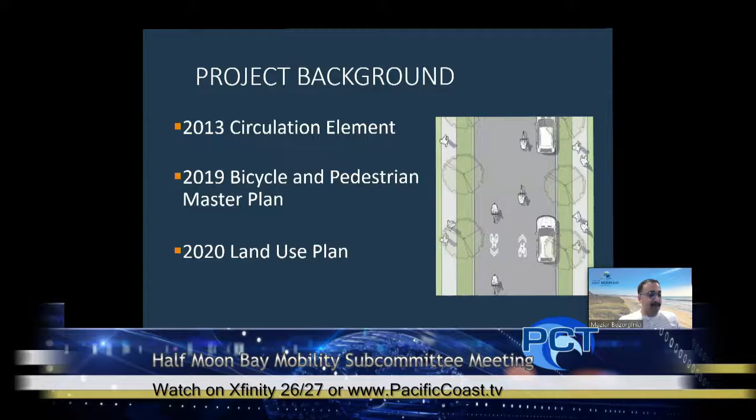This project has been anticipated in multiple city adopted plans and capital improvement programs over the last few years. It's identified as an implementing action from the 2013 Circulation Element for supporting bicycle and pedestrian travel along routes that connect the Coastal Trail with the Naomi Patridge Trail and Main Street. The 2019 Bicycle and Pedestrian Master Plan identifies Poplar Street as a major connector street with significant sidewalk gaps, making recommendations for Class 3 bicycle improvements, high visibility crosswalks, and pedestrian pathway connectivity. The recently updated Land Use Plan further recognizes the need for this project to improve coastal access while being context sensitive to the neighborhood character.

Some project background: as John mentioned, there was a resolution of support from the City Council back in 2017 for the grant application submitted for the OBAG 2 grant, the One Bay Area 2 grant. There are some concerns with the timing of that — obviously 2017, it's been a while since those funds came through. They're actually in the process of distributing OBAG 3 grant funding now, so we're at the tail end of the grant program for OBAG 2.

Going back a bit, we've been doing quite a bit of community outreach since that time. We had our first major community workshop in September of 2018, followed up with BPAC meetings and updates in November of that year. I want to highlight that we attended the Senior Transportation Fair back in January 2019. It was a wonderful event, and we were able to highlight and showcase our thoughts and project schedule at that time with the seniors, and we received quite a bit of positive feedback from those in attendance.

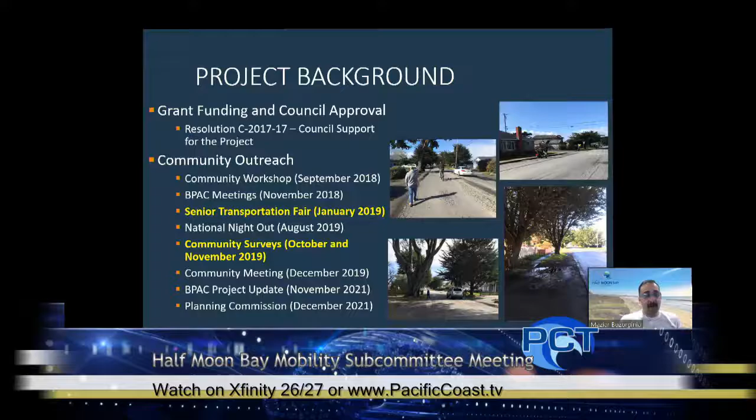After those surveys, we had a community meeting that December, and the next meeting after that was the Bicycle and Pedestrian Advisory Committee project update in November of this year. I don't want to belabor the point, but I wanted to mention the delay caused originally by the beginning of the COVID-19 pandemic and some of our budgetary issues and concerns — this was one of the projects that were unfortunately shelved at that time, so there wasn't a lot of work done.

In 2021, we were able to restart the project. I wanted to highlight that because we do feel that lack of continuity from that December meeting to the BPAC project update in November of '21 had an adverse impact on our momentum on this project. Two years is a long time, especially these specific two years, during which a lot of folks went through quite a bit of hardship on many fronts. Most recently, we had a Planning Commission meeting this past Tuesday, which we'll talk a little more about, including some of the comments that came from there.

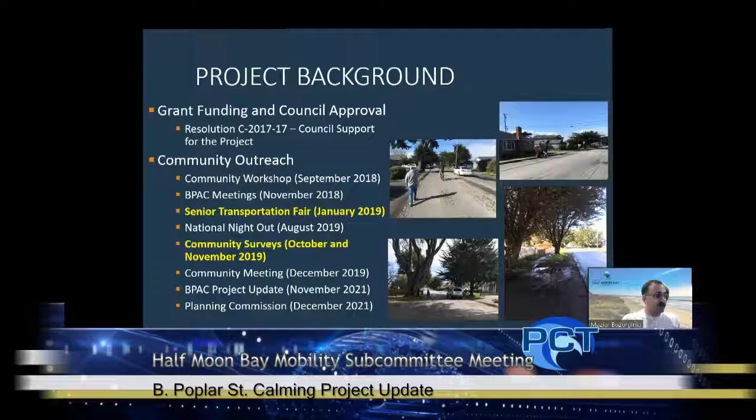A little bit more project overview. The Poplar Street traffic calming and safety project includes traffic calming measures. We're looking at traffic circles as well as utilizing existing parking spaces and other methods, which we'll get into in a little bit more detail. We're also looking at bike ped connectivity improvements as well as safety improvements, street repairs, maintaining our existing pavement section, as well as drainage improvements along Poplar Street to capture some of the stormwater currently surface flowing through Poplar, as well as implementing our green infrastructure program.

We do require some permits. There is a CDP, a coastal development permit required for this project, given it's a public works project in the coastal zone, as well as a tree removal permit for a few trees on the downtown side of the project near Main Street. There are 6 trees required for removal, given the line of sight and their location being right underneath some utility lines. Unfortunately those are the ones that will be removed, and we have replacements as part of those, which I'll talk to in a little bit more detail.

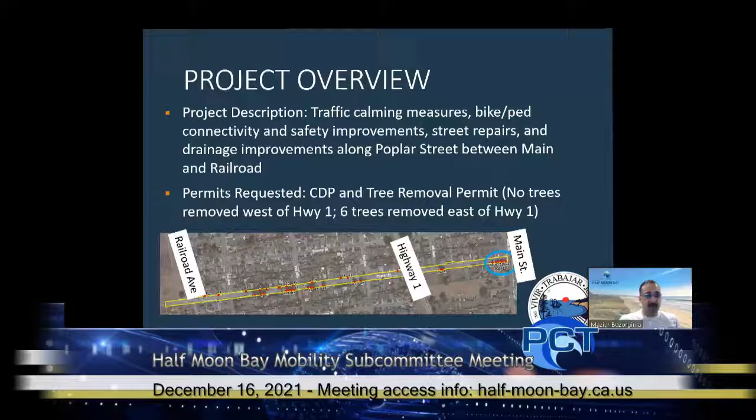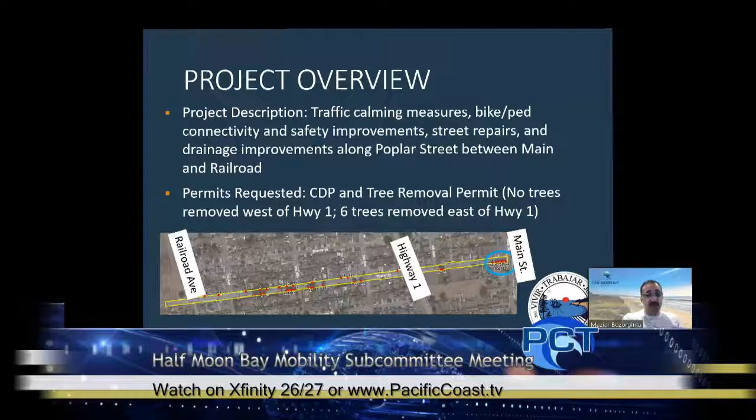None of the cypress trees on the west side that are really iconic to the character of the street are being recommended for removal. Some minor pruning may be done as part of the project, but nothing major and no removals on the west side.

I talked a little bit about that. These are the 6 London trees that we were talking about. This would be to accommodate the sidewalk improvements and to ensure line of sight for folks at the intersections. And with the removal of those, we're looking at implementing approximately 30 new street trees along this corridor.

This is the one segment, I would say, where we do have a kind of open view of the cross section as you're coming through. And lining the street up with trees also provides that traffic calming benefit that narrows the visibility of the view corridor for a driver. So that'll be the trade-off there, is that we would be able to construct and plant 30 new ones. And again, no trees are being proposed to be removed on the west side of Highway 1.

Here I just want to talk a little bit about our project goals and benefits. This of course ties a lot to the funding and our grant application and program that we've been awarded.

So why are we here? As the city's bicycle and pedestrian master plan was commencing, many community members requested improvements in access for safety, especially along Poplar. The senior center was a big proponent for this project, as well as a lot of parents with school-age kids. The Seacrest School comes to mind, but others as well that walk through this corridor.

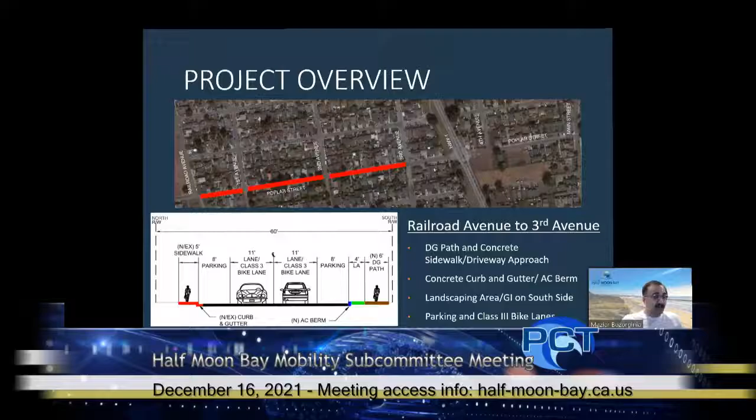John, that's correct. And I also wanted to highlight that for this project, we were proposing to pave the parking areas as is typical for existing parking along improved streets in Half Moon Bay. Although that was one of the feedback items we received from the Planning Commission, that they did not like that portion of the pavement.

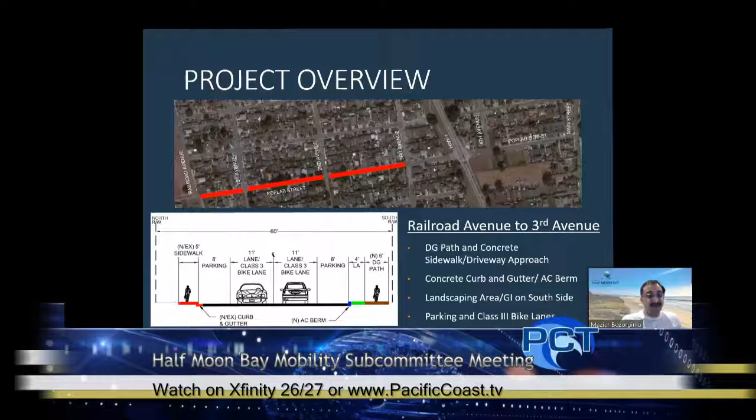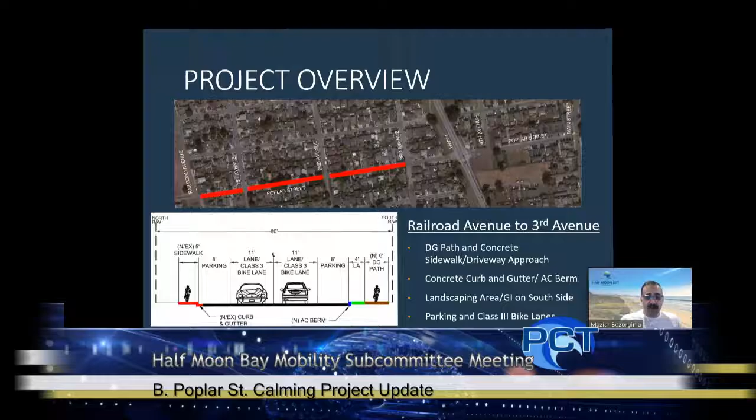And I just wanted to emphasize that this is not a street widening project. That was a comment that was received by staff, and I just wanted to reiterate that we are not widening the travel lanes in any particular location. The only areas where we were looking at additional asphalt were for the parking areas, and that was for longevity and long-term maintenance of the area. So just wanted to reiterate that.

There is a very unique segment within this section of the project, and I wanted to highlight that. It's between First and Second Avenue, where we have those two very large cypress trees that are slightly offset. It's a very iconic cross section as you drive through Poplar Street, and I wanted to make very clear that these are two of the most mature and beautiful trees out there, and our intention is not to remove them. In these locations we would actually look at doing a decomposed granite pathway on the south side, for the purpose of protecting the root system of these cypress trees to ensure their health is maintained, and keeping the area around the trees as part of the landscaping and green infrastructure.

As we get closer to Highway 1, the characteristic of the street changes a little bit. There aren't any existing trees. Hey Moz, can you go backwards? Go back one slide.

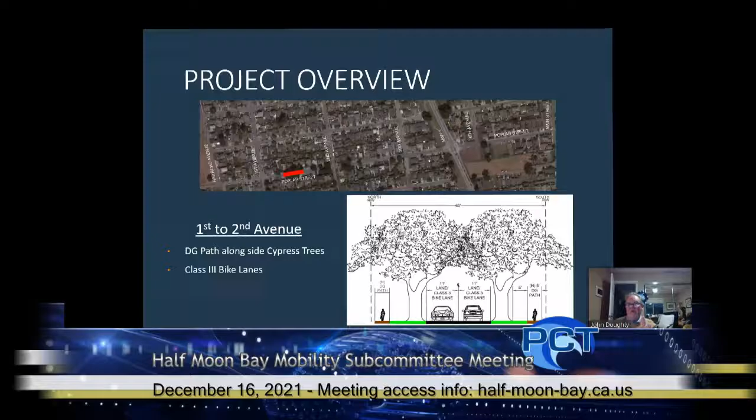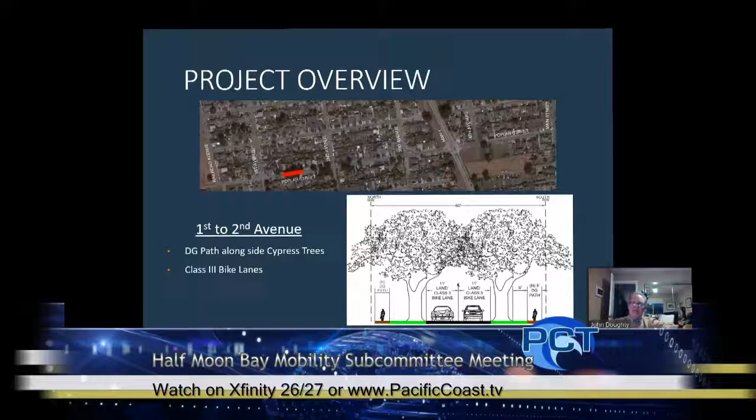What I will say, if you look at those trees, part of our designs are driven by trying to maintain relative continuity in the pedestrian access and path of travel. And these trees certainly, and retention of these trees, make that difficult. It's very difficult to say—instead of having the parking, in part that would be a problem because of the Coastal Act. But beyond that point, you also have the issue of these trees being right in the way of having bike lanes off to the side of the 11-foot travel lanes. So you would have this point where you would break up these lanes and deal with that. So these are iconic, we want to preserve them and deal with it, but they have created a challenge in design.

I think it's an important piece to understand why we've had to balance all of these desires and community wants and needs out of this deal. That's all, I just wanted to point that out while you had it up. Thank you, John, appreciate that.

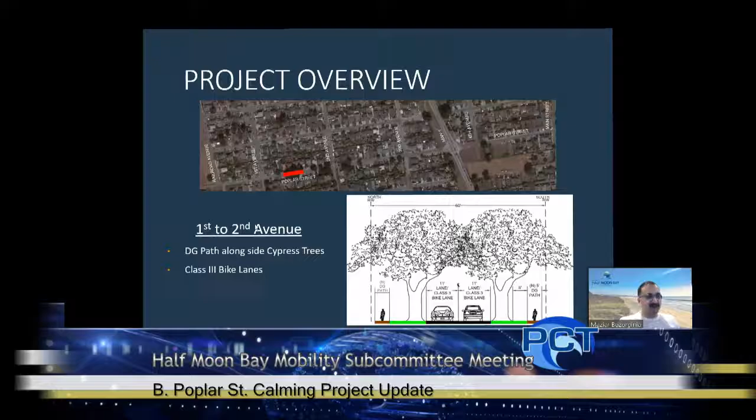And in a unique way, we're using it as traffic calming. Essentially they're bulb outs, so in that regard we shifted to using this with that intended benefit. All right, so now with this segment, the small segment from 3rd Avenue to Highway 1...

This particular area is a little bit different in that we have existing concrete sidewalk on the south side. There aren't really any trees - I think there are some bushes, shrubs, and landscaping, but no major trees in this particular location. And on the north side, we actually have a lot of the shoulders already paved with asphalt.

So in this segment we're looking at installing concrete sidewalks and driveway approaches. And then, as we are with the remaining portions, we're looking at Class 3 bike lanes - sharrows with the vehicular traffic through this area.

All right, the third segment we'll talk about is the intersection with Highway 1. It obviously has its own unique characteristics and scope of improvements. We originally were looking at how we could best work this intersection and modify it to improve connectivity for our project.

However, during our design process there were some conversations with Caltrans, and it came out that they're actually working on a major project for pedestrian and bicycle access and safety. The project itself is actually very large scale - they're looking at improvements from Wavecrest to Moss Beach.

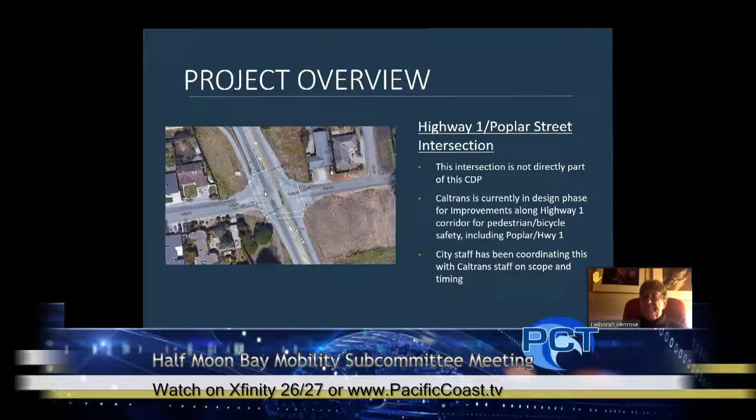It's along the entire corridor, east and west side. So east and west? Yeah, they're not - it's not going to be a continuous... I doubt that we're going to have a continuous one. I haven't seen the scope right now. They've been taking a lot of feedback from the community.

So we've mentioned the need for connectivity for east and west side for Class 1s, but they're going to be looking - I think more specifically at the crossings of the intersection and improving the intersection equipment itself. So I'm thinking more like bulb outs and ADA ramps at the corners, the refuge islands in the medians where folks who may be walking slower can have a safer place to pause and push another button. But we will also continue to push them for the overall connectivity along the corridor, both on the east and west side as well.

Thank you. Absolutely, and again that's in the very early stages of the project, but based on the schedule they've been doing, they've completed their survey work throughout the corridor. They were actually out here a few months ago, and we will be getting an environmental document for review in the coming months. So this is going to be coming up pretty quickly here, and it's a really great opportunity for the overall community. I will be doing an additional update to the council on this separately.

Because obviously this was one major intersection, but they're looking at all of them. So we're going to have a lot of great opportunity to really advocate for the improvements of safety that we're looking for through the Highway 1 corridor. So we're going to continue coordinating with them, and with that we can save the money and utilize those dollars on the local street section. We will be looking at some connectivity improvements in the interim.

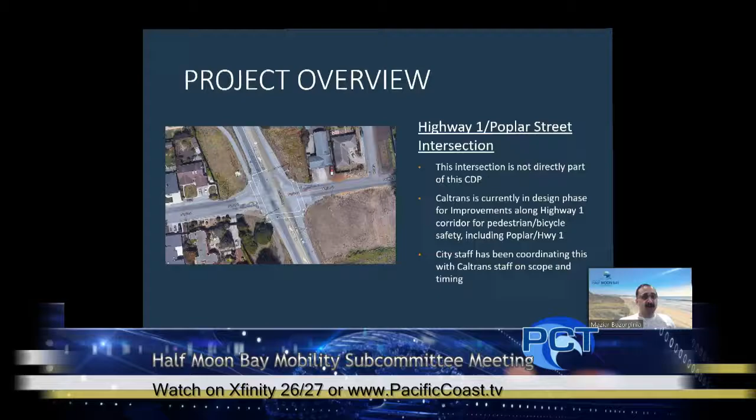Possibly tweaking the signal with Caltrans representatives to ensure that bikes will get detected as they approach the intersection. It'll be a share the road scenario for avid cyclists as well as novice or recreational riders, who would be able to dismount and use the crosswalk to get across Highway 1. That'll be the temporary improvement while we wait for Caltrans. Based on the schedule they shared and ours, we anticipate they would come on board right after we complete our project.

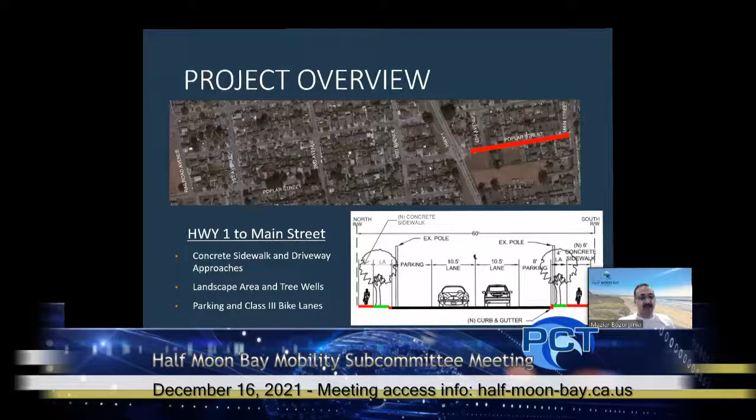Next we have the segment that's more of a commercial downtown feel, though there is residential as well. From the east side of Highway 1 to Main Street, we're looking at implementing concrete sidewalks on both sides, and establishing tree lines along the corridor, especially on the south side of this segment of Poplar, where there aren't a lot of existing trees. There are 6 grouped close to the Main Street intersection. Our hope is that this project would remove those and replant with over 30 spread throughout the corridor, giving it more of a calming feel and closing that tunnel vision frame a driver gets going through the corridor.

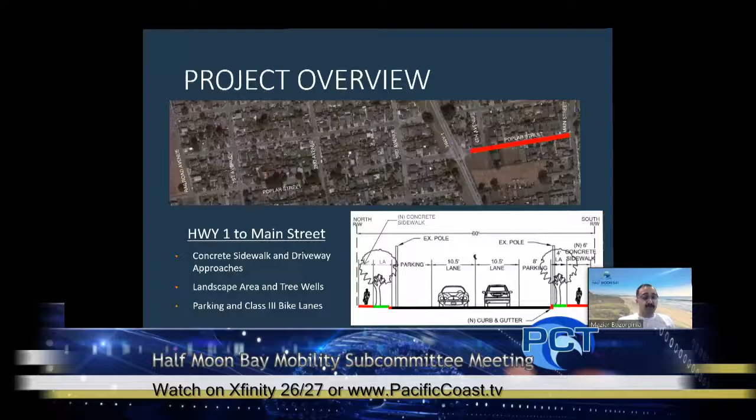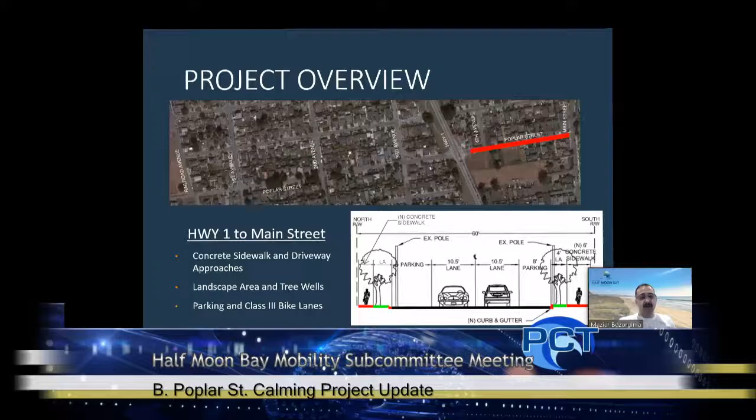One comment we received from Planning Commission and in writing was that community members would like to see more traffic calming elements here. We do have parking, which when filled provides a narrowing of the vision, and we'll have pavement markings that also narrow the lanes. But some comments wanted to see more than that, so we're looking at it. There's potential for a traffic circle at 4th Avenue or bulb outs in other areas. We've taken those comments and will look at what we can incorporate, and we'll have something more robust on the east side as well based on the comments received.

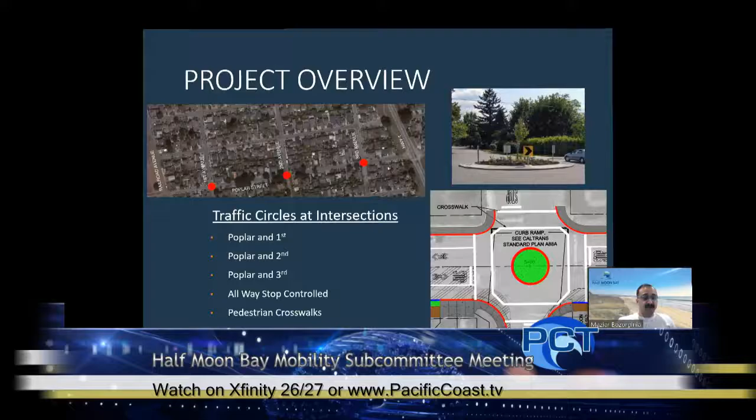We have pedestrian crosswalks proposed to delineate the areas and provide safe marked crossing points. Another benefit we're looking at is to utilize the center of these traffic circles for landscaping and beautification, as well as implementing additional green infrastructure to improve the quality and reduce the volume of runoff on the roadway, by removing some of the sediment and contaminants contained there.

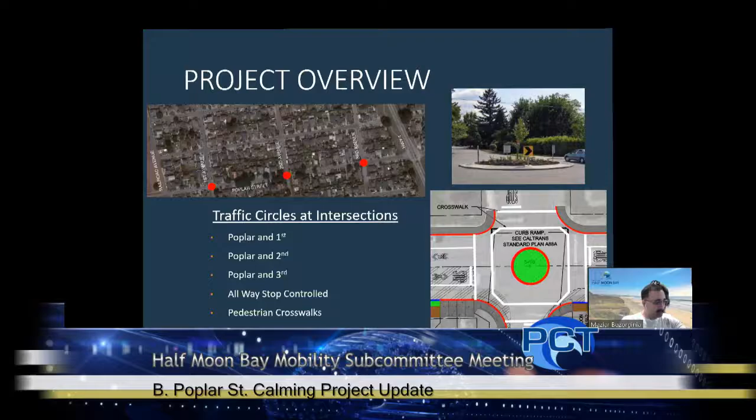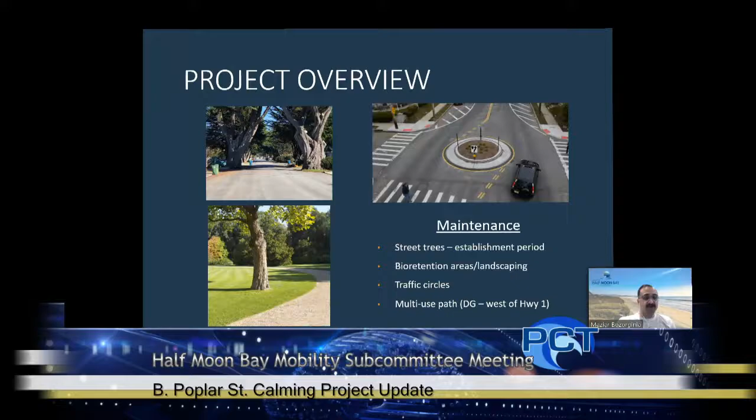A little bit on the maintenance side. As far as the establishment period, generally we look at 1 to 2 years for establishing street trees, which the city would oversee and maintain. Beyond the establishment period, we would partner with local residents and commercial business property owners to jointly maintain the street trees moving forward. The bioretention areas, traffic circles, and the decomposed granite pathway we're proposing will all be elements of maintenance required by city staff.

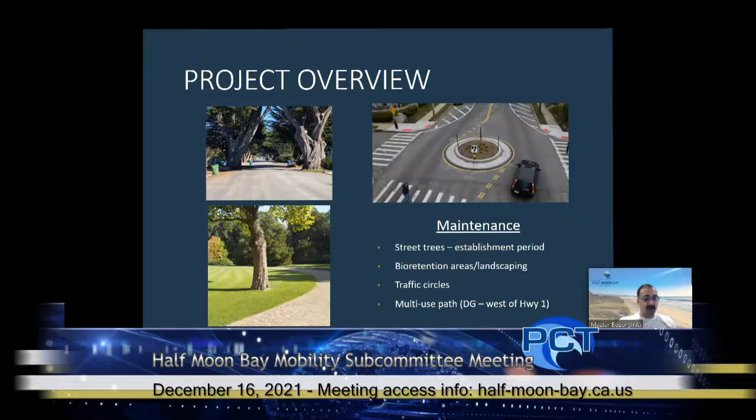Now I want to touch a little on the project funding. We talked about our overall grant proceeds - we have 1.2 million programmed for the time being. We are at the tail end of the cycle for this OBAG 2 grant, and therefore there is a potential for losing the funds, which is why we're looking to implement this project and move it forward as expeditiously as possible.

There's no exact deadline. The way these grant systems work, especially at the tail end, is that a lot of these programs are oversubscribed. As we get to the tail end, if other projects are looking to fill funding gaps and are shovel ready and farther along, there's a potential we could lose our place and get kicked down the line. If that happens, we could run out of OBAG 2 funding, and it doesn't roll over to OBAG 3. We'd have to resubmit an application and go through the process again.

Some other options we've been looking at are deferred street improvements. We have 21 deferred street improvement agreements along the corridor of the project, out of 90 total properties, of which I believe 10 are currently vacant. There's potential for some cost sharing as part of that, prorated per linear foot based on the improvements being proposed for the project. That would help some, but it's not going to cover the funding gap that we have.

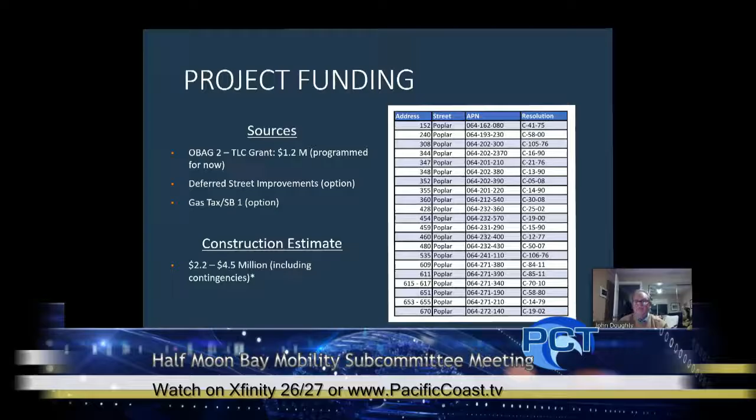The only thing I'll say, and I've said this before, is most of the people speeding are residents and neighbors, trying to beat that traffic light at the end during the morning commute.

The good news is if you do a pilot, it's easy to measure the efficacy because you put those little air hoses down, and it's pretty easy to gather the data - did it work or didn't it.

We did traffic counts, and Moz didn't mention it because we weren't trying to get into all the weeds, but those traffic counts, because of the tubes and all that, also pick up the idea of speed. Yeah, so we do have some of that data, and we did that in advance of doing the design on this project.

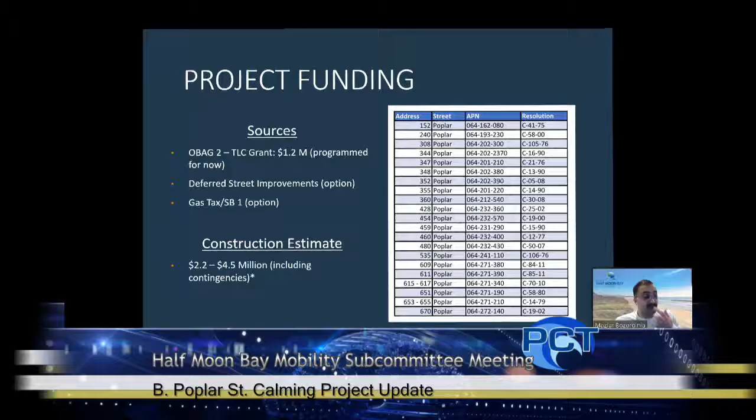That data is actually available on our website, and I'm happy to share it with you folks via PowerPoint if you'd like. That's great, and yeah, fantastic - thank you, very helpful, and I think this is useful for the community.

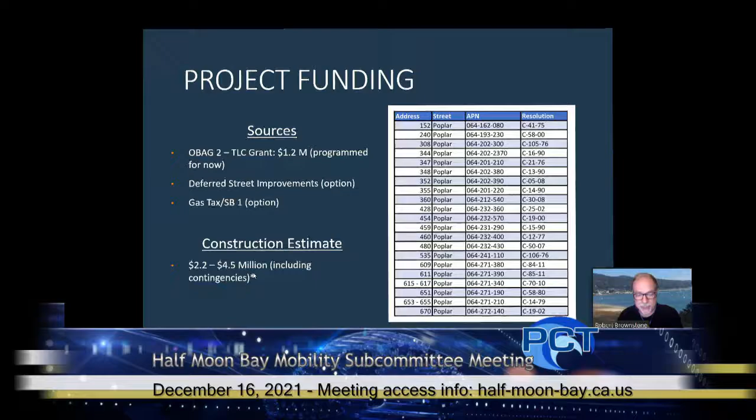I think you were back on mute, Deborah.

The first question I have has to do with the phasing of the project. I'm wondering if you've considered phasing it so that one side of the street is done at a time. I know it may be more expensive, but if we're talking about the safety of our children getting to school and our seniors getting to the beach, then having pavement on one side of the street going all the way from Main to the beach would be ideal as far as I'm concerned.

Councilmember, you are a genius. That's exactly how our phasing plan is being looked at - to basically do one side of the improvement and then come back and deal with the other side. It's exactly what we're looking at, for the reason that we get full disabled ADA access, and then we can come back and fix the other side when we have the money, if that's the way we have to go.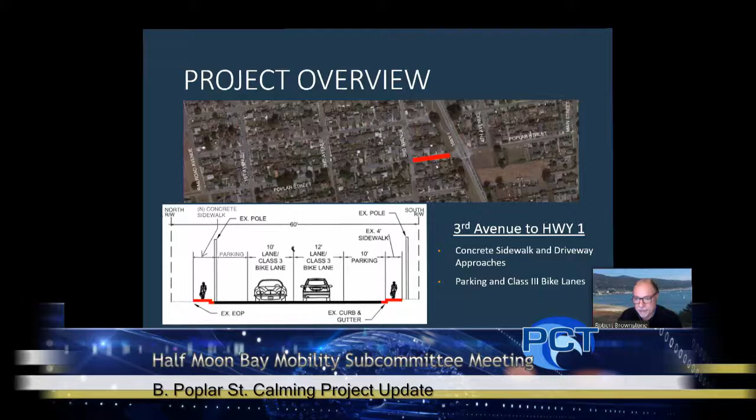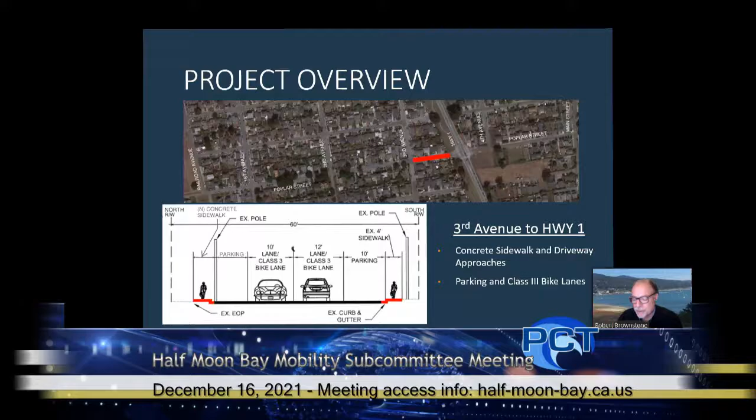Thank you, Councilmember Penrose, and I agree. Having the numbers, having the options sets us up for contingencies. If we get an extra grant, or if some other money comes from another project that a grant fulfills, it's nice to always know what each level of work will entail and cost.

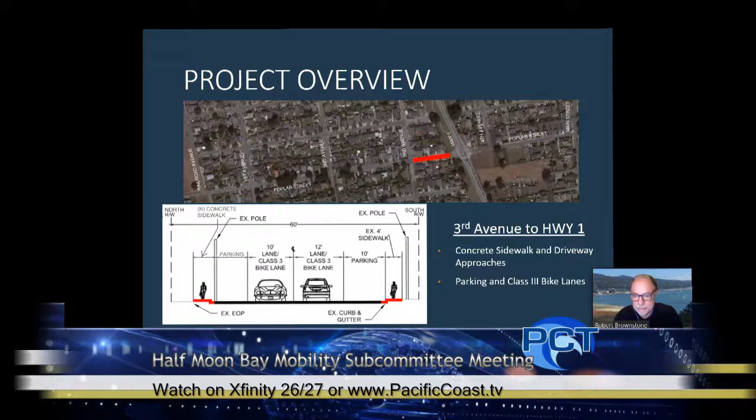Are we ready to move on to our second presentation on the Main Street Bridge update? Sound good? We are, let's do it.

I'll do a little introduction while Maz sets up. In November it was my 7-year anniversary with the city. I came on just after the election in November, when the initiative had gone through, and there was a lot of hand wringing in the community about the two initiatives and this bridge. I'm very sensitive to it, and my staff, I've tried to bring them up on the history, and I think they're very sensitive to the issues. We've really been trying over the last years to bring this forward and bring the community around, and not have this be a divisive issue at all.

This is a challenging issue, made more challenging by Caltrans and their construction requirements and new changes they made to safety requirements. It's just been, frankly, an uphill run to this point. We're obviously trying to maintain the integrity of the historic aesthetic of this bridge, and its functionality, while also trying to bring this around to something that will last for at least 75 more years, from a seismic standpoint and from scouring and the issues on that creek.

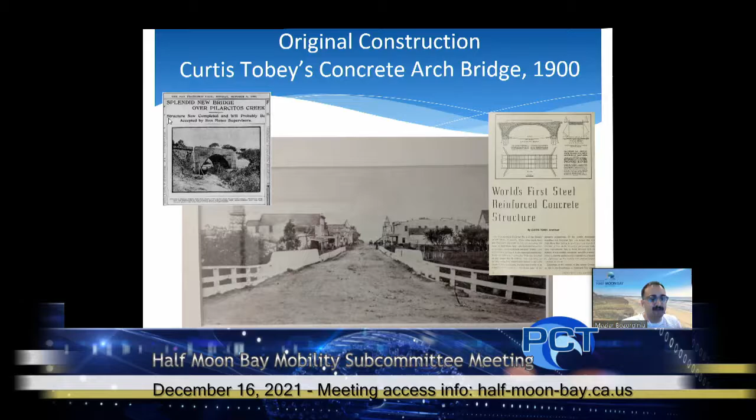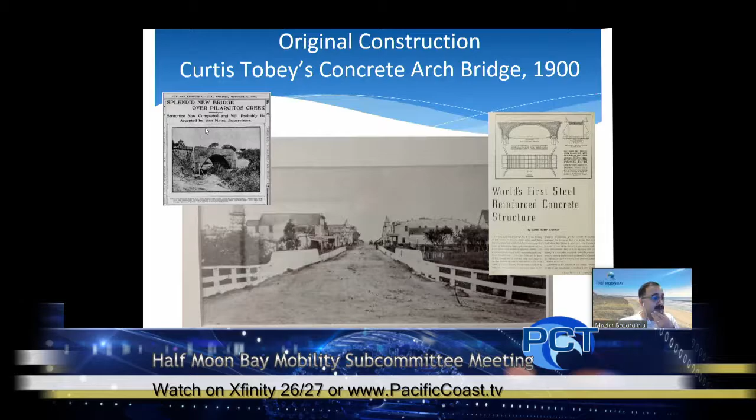Our original construction of this bridge was back in the 1900s. I have to point out, I love this news clipping, in that the way project delivery has changed over the years is notable. In this case, the bridge was built, and then they were hoping that the San Mateo County supervisors would accept it—a very different process back then. I had to point that out because the wording is also splendid, something you don't see in newspapers anymore. So this is what the original structure looked like early in its life.

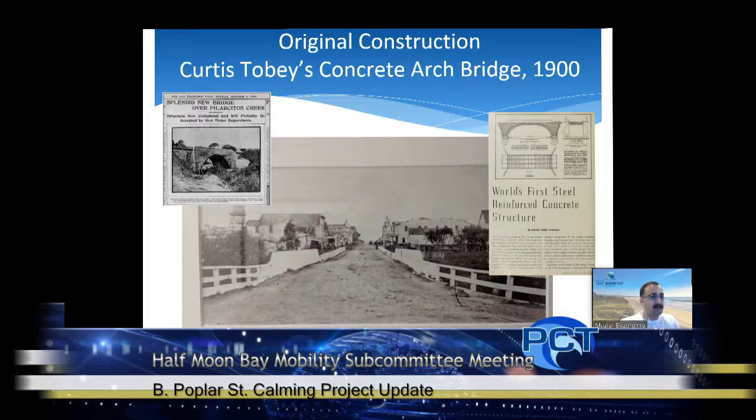Then, between the 1920s and 1940s, we got the addition of these walls and columns. That was something added on after the fact. We also added the sidewalk on the west side in that same time frame.

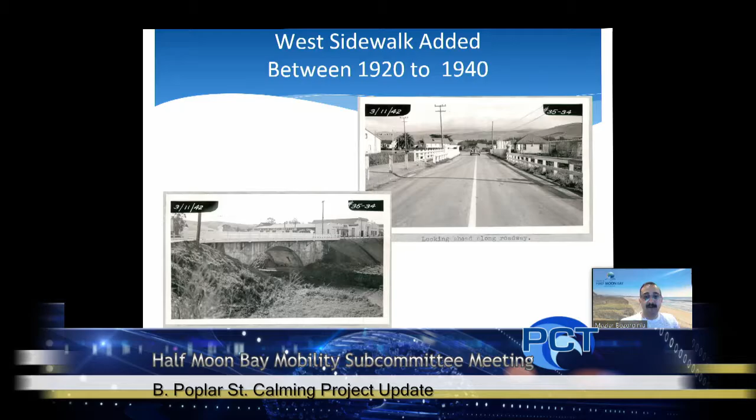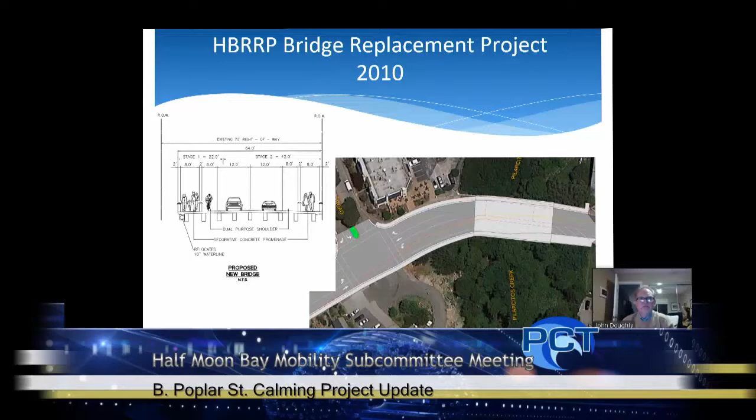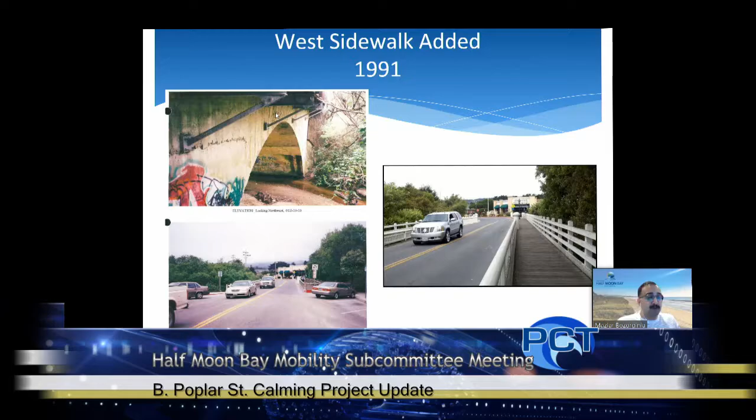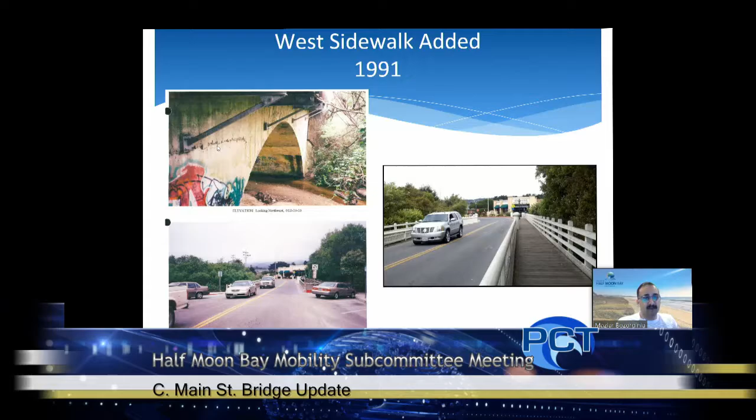Sure, just want to point out how these walkways are attached, since you have that picture up. Oh yes, another good picture. These walkways were added after the fact, and they're essentially supported by rods connected to the bridge structure itself. They're cantilevered out with extra support, which adds a little more weight and pressure to the sides of these wing walls and the arch structure itself. Thank you—that goes on both sides.

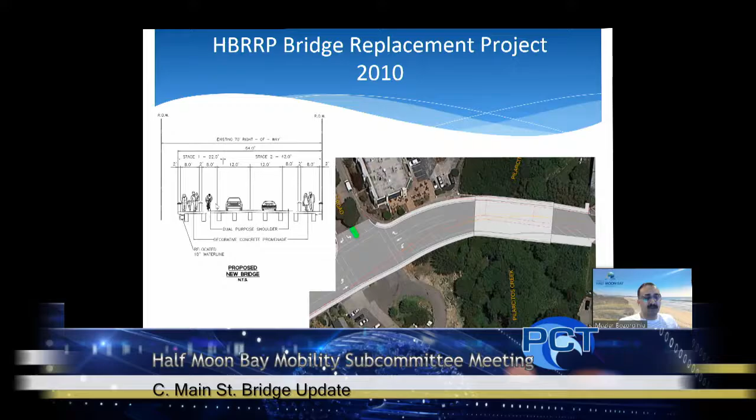Thanks, John. Back in 2010, this was when a lot of the funds started for some folks. The original proposal was to do a pretty significant widening in relation to what existed. There was some purpose for that—there could be the addition of bike lanes, although no additional vehicular lanes were proposed at that time. But there was a lot of conversation about that, which brings us to 2014 and Measure F, and the registration of this on the National Register of Historic Structures.

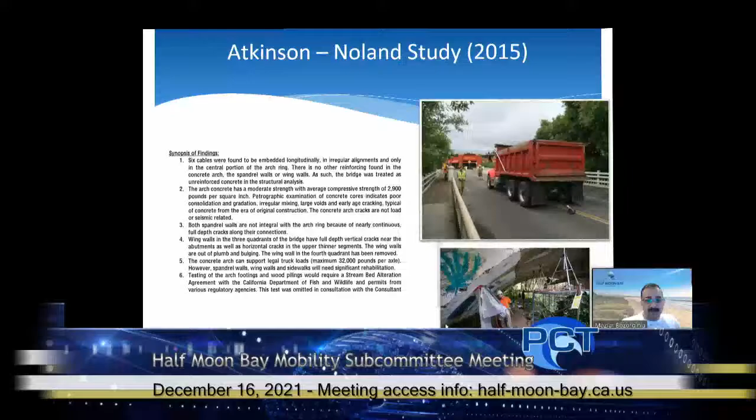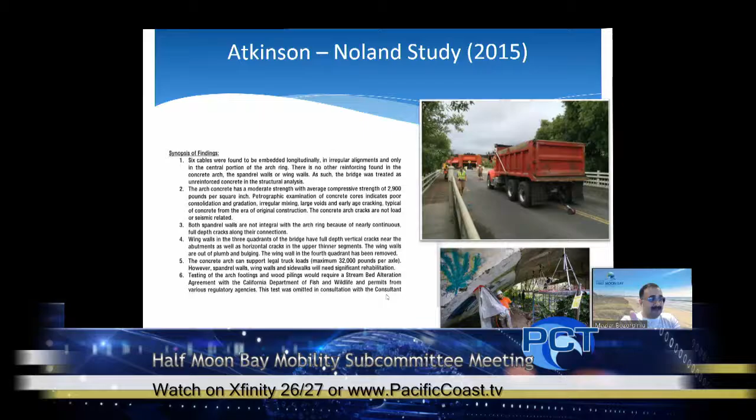I think I do. So you have the spandrel arch here, and beyond that you have what kind of looks like a wing coming off of the bridge — the area that goes back into the embankments to hold the abutment back. It's where it flares out and goes up against the sides. A lot of it's actually hidden; you see them as concrete against the stream bank that the bridge is basically locked into. It's the foundation system for the tie-in.

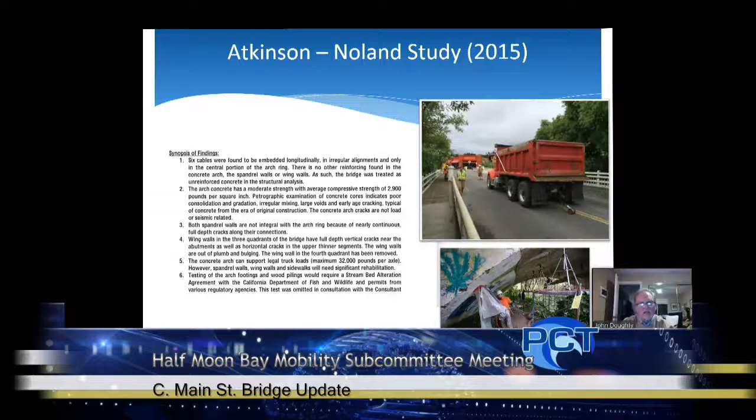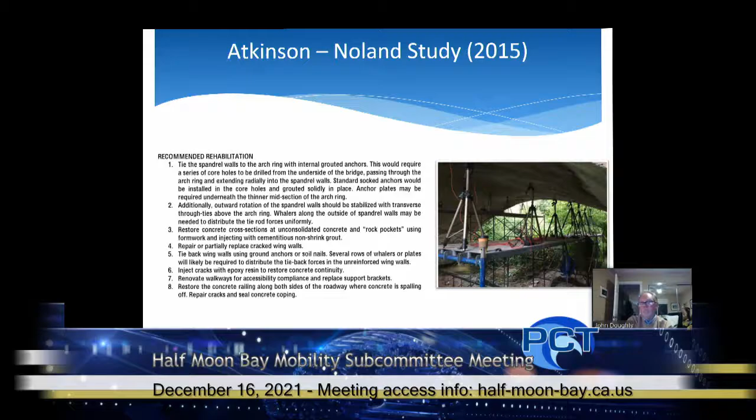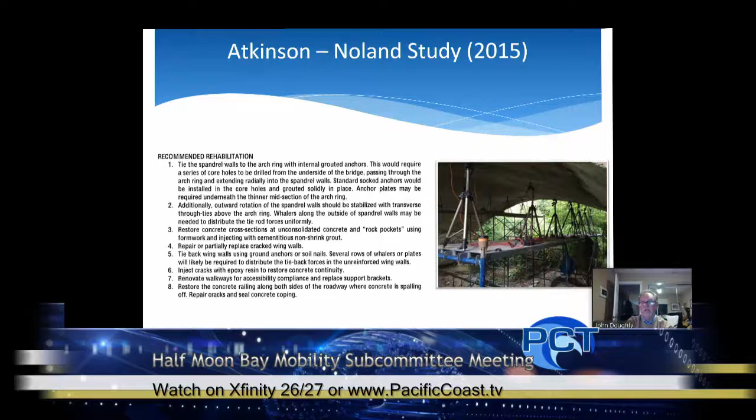Number 7 is to renovate the walkways, get them ADA accessible, and make them work — partially this issue, as they say, replace support brackets. ADA compliance, again, kind of the theme of the night given with Poplar, is important for us because the courts have said our walkways, streets, travel ways, all those things are part of the program for disabled access or accessibility. This is one of those that has to come into that mix too, and that's something we're also looking at in this work.

Thanks, John. Yeah, we have the wood planks right now, so the nails, as they become loose, can become tripping hazards. Our maintenance folks have to keep a close eye on some of those. This was also identified as part of our ADA transition plan, which was approved a couple of years back. Thank you, John.

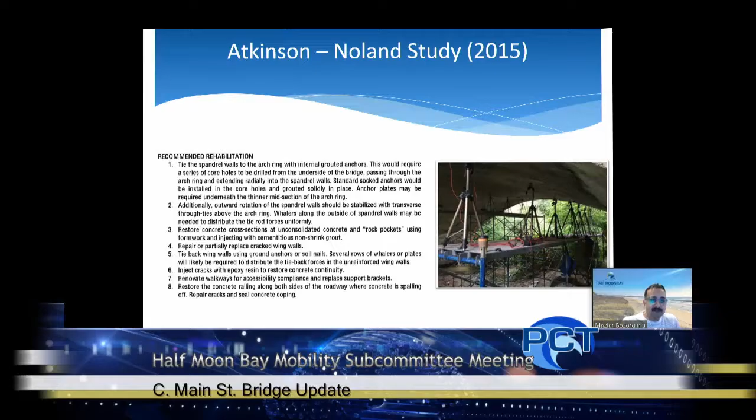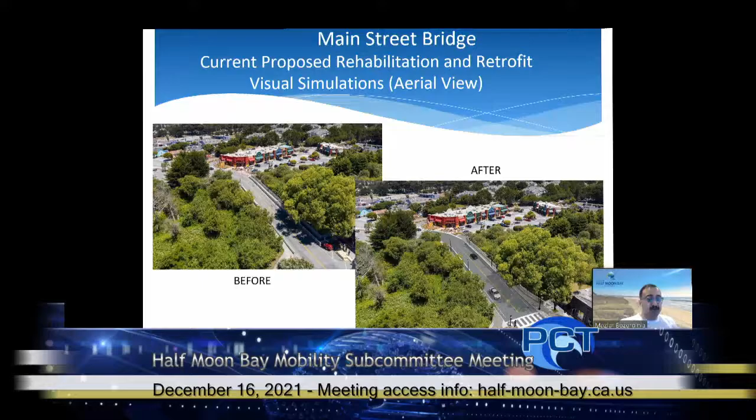All right, so then we went forward with our project design. We looked at building a support structure to contain and keep the existing structure intact, preserving the arches, which are considered the most significant historic portion of the bridge. The problem was we couldn't really rehab it and add additional load without basically replacing it. So we are utilizing that existing archway and supplementing it with additional support and piles, which we'll show. This was one of the original aerial views and simulations we did.

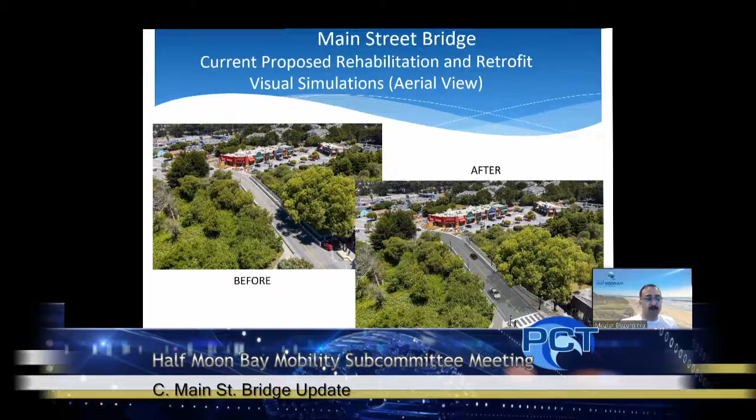Here's where it gets a little interesting. Part of the Caltrans requirements come in conflict with the historical aspect of it in a way. We had to incorporate crash cushions as part of the safety barriers required for this project. These are the crumple zones you'd see in other bridges, essentially designed to absorb impact if a vehicle would hit it.

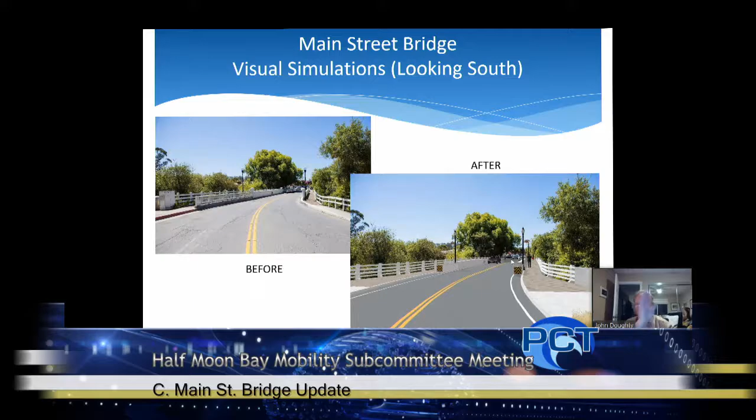Remember that we came to the council with these issues and went through this thing. Yeah, I remember these pictures. So yeah, that was a critical piece, obviously, that was in conflict with the historical aspect of it.

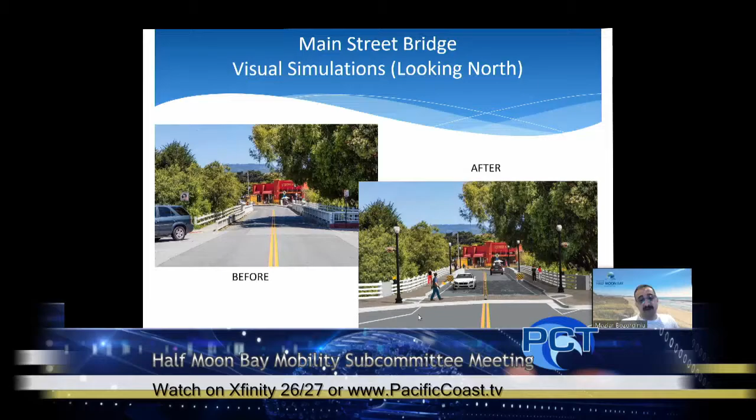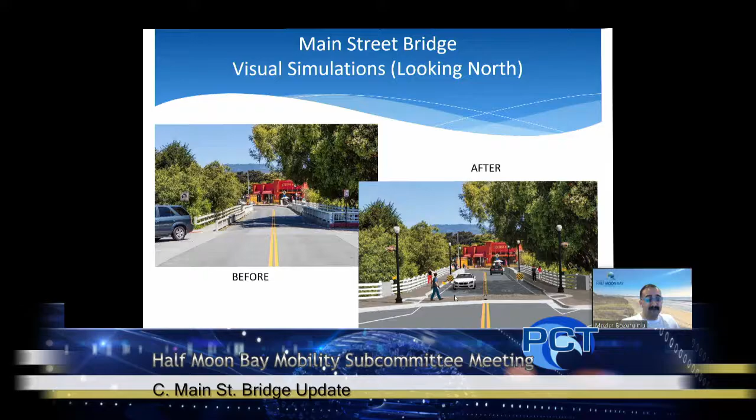Here's a rendering looking north. Based on comments from the Main Street Bridge Advisory Committee, they wanted to incorporate additional access and crossing while providing speed calming and safety for pedestrians. The old design had a basic ladder crosswalk, so we proposed continuing the same sidewalk material through the crosswalk itself, elevating it as a speed calming measure. That's something we incorporated based on that feedback.

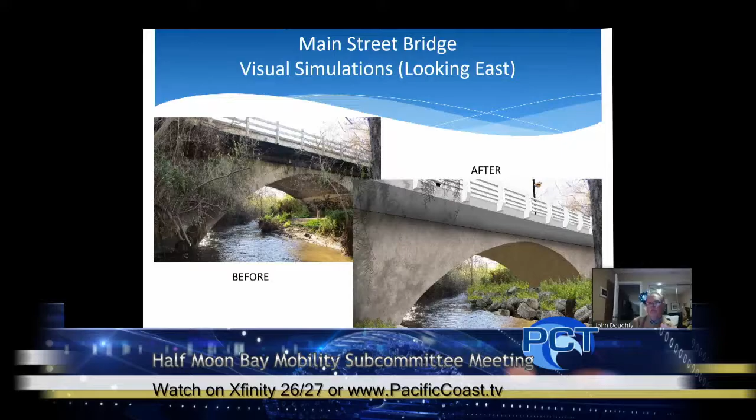Hey Moz, point out, look at the brackets too. You might as well, what's the difference? So the brackets versus non-brackets. We were talking about the railings itself? No, I'm talking about the cantilever, how they're handled differently. That's one of the best examples of how the cantilevered walkway issue is handled.

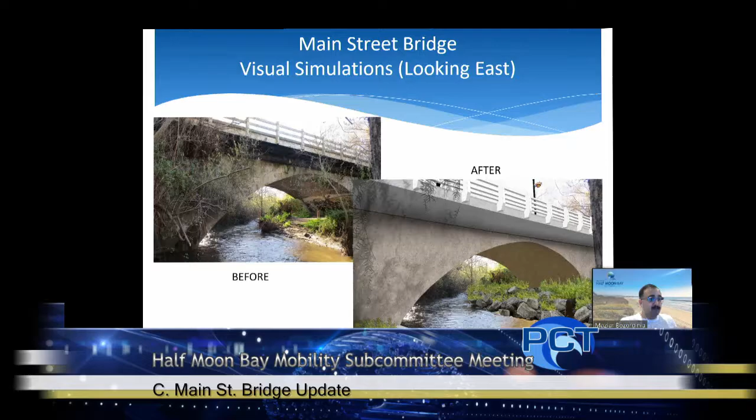Essentially these walkways currently put the load on the structure itself. This design takes the load off of the bridge and connects it on the embankments instead, so they would be separately supported without adding that additional load onto the bridge. This keeps the original structure in better condition, removing load that has been part of the cause of some damage to the bridge itself. Thanks, Moz. You got it.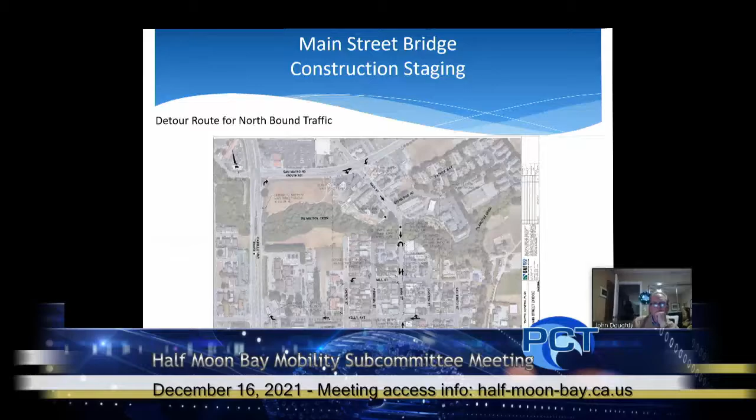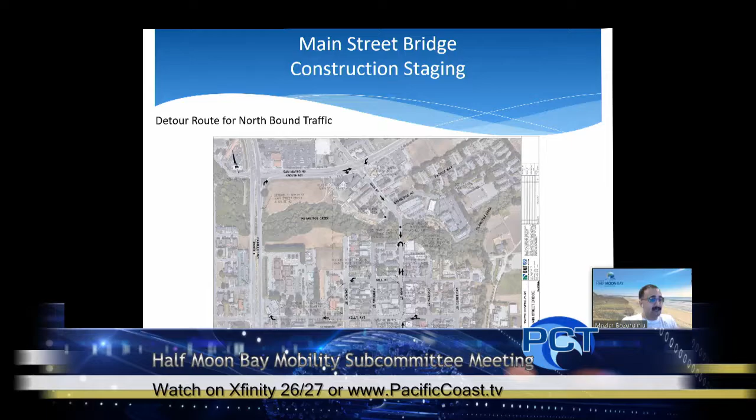So we've been looking at some preliminary detour plans. With this construction, the idea is that we would need to close one lane. It would be a phased approach. I have some phasing plans, I'll go through them pretty quickly without a lot of details.

We would be looking at doing inbound, southbound traffic on Main Street from 92, with a detour in place before you get to Main Street Bridge for access to those businesses from the south. We would control it so nobody would be going north from there on Main Street, instead having folks go back to Kelly and Highway 1, a safer route. There would obviously be some impacts to traffic during construction, but this was the safest way to do it without closing the entire bridge structure down to traffic.

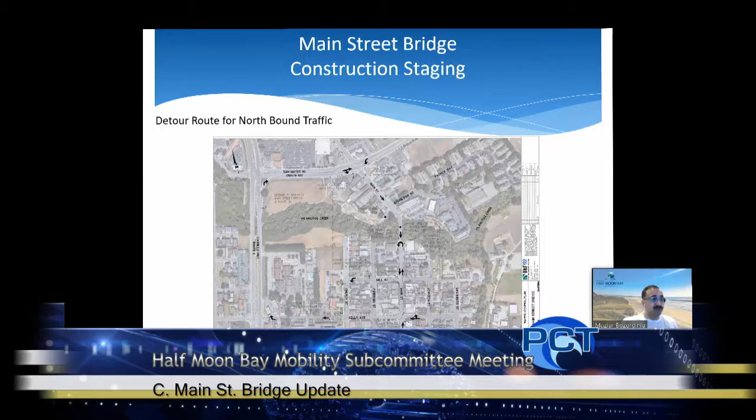And let me jump there. We may not have entire agreement right now, but luckily we have time to talk about this.

There's been development of automated arms and control points allowing two-way traffic in one lane areas without needing flag people to signal. I think we still have to continue looking at that and see if there's any way to do it safely and allow two-way, one-lane traffic through there. I know the business community is going to be really pushing that. I agree that one way in and out is the safest approach, but I'm also looking at the realities and political challenges that will come to all of us regarding the businesses.

I just want to say we're still looking at that, and those plans are not written in stone.

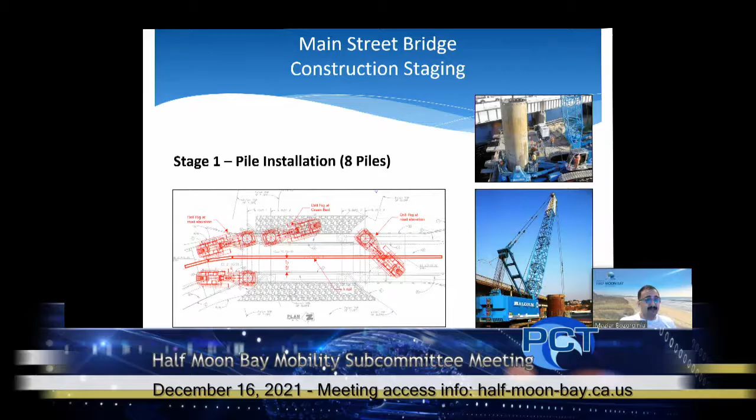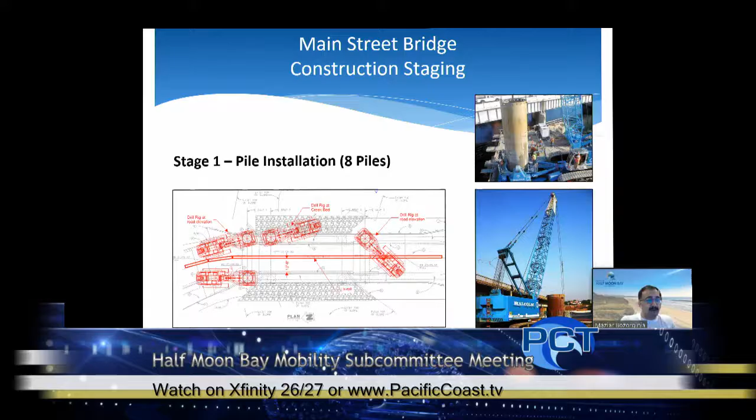Based on the equipment and staging, we have a lot of sensitive habitat and a creek, so there's not a lot of room to work on this project. We're trying to limit how much equipment goes into those sensitive areas, utilizing the area up here while maintaining some traffic flow through.

So it's kind of the same approach. I have a couple of different cross sections and can go into details, but essentially we'd be working on certain segments, then flipping it over to other areas, while still maintaining certain staging for traffic.

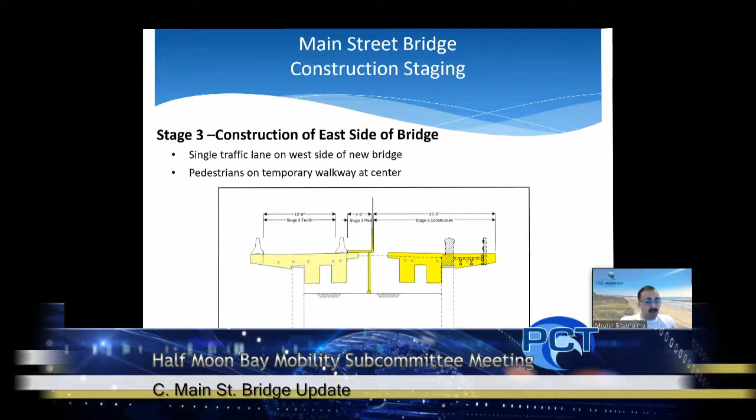I want to highlight that it's not just vehicular traffic. We would also continue to maintain connectivity for pedestrian access. I want to make sure we're not only looking at vehicles crossing during construction - we will also provide a narrower path of travel for pedestrians as well.

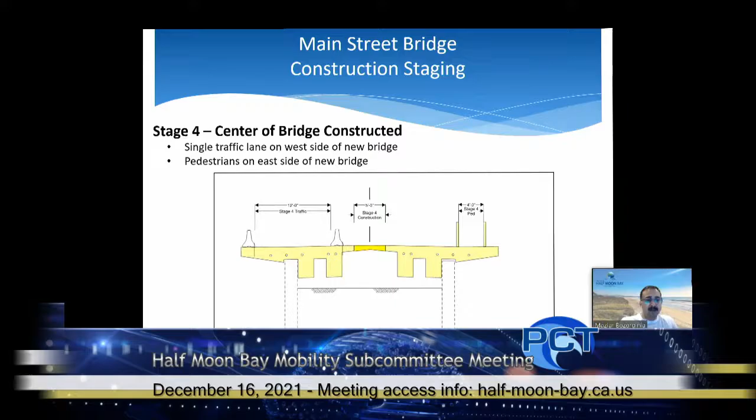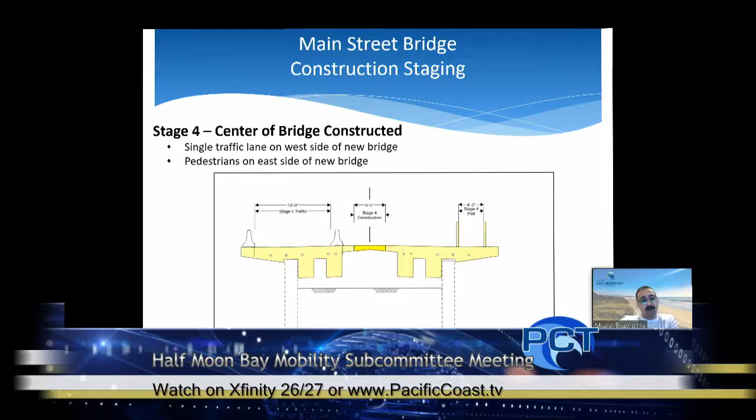So again, flip-flopping and moving around to different areas. Here we'd be doing the same thing, working in the median area. The vehicular traffic would stay, but we would be swapping the pedestrian access pathway to the newly constructed section of the path on the east side.

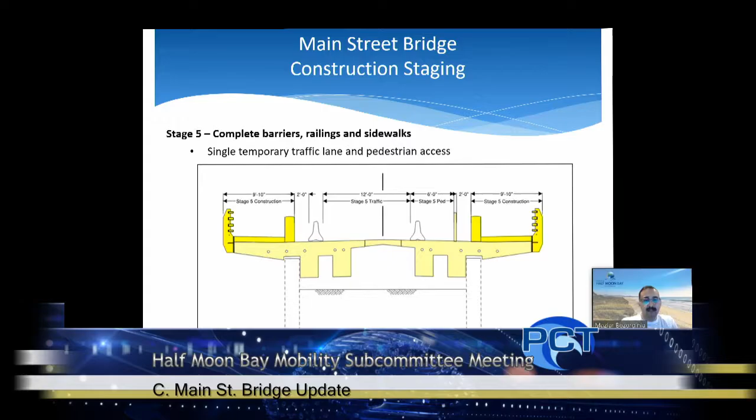As far as our project schedule, the formatting got a little jumbled up here. But essentially, as John mentioned, we're getting towards the end of the environmental review. We're hoping the document will go out in early 2022. As we finalize the design elements and package for construction, we'd be going out for final permits, with construction commencing in early 2024.

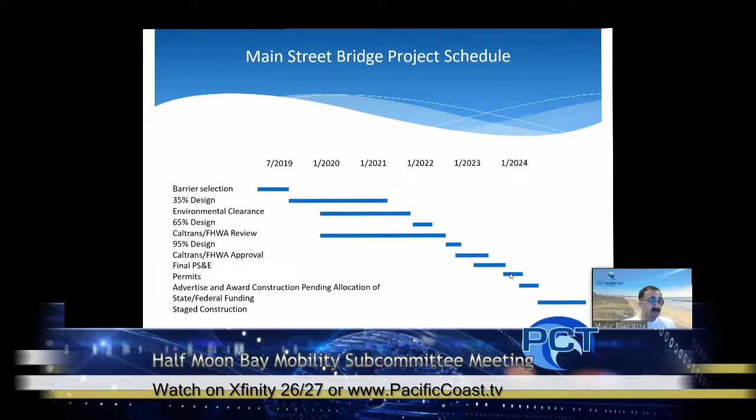If all goes to plan, it would be about 12 to 18 months from there. We're still looking at some of those details and tweaking some of the staging to see how we can best speed up that schedule.

Just like John mentioned earlier about some of the other temporary measures, none of this is set in stone quite yet. We're still going through that process with Caltrans.

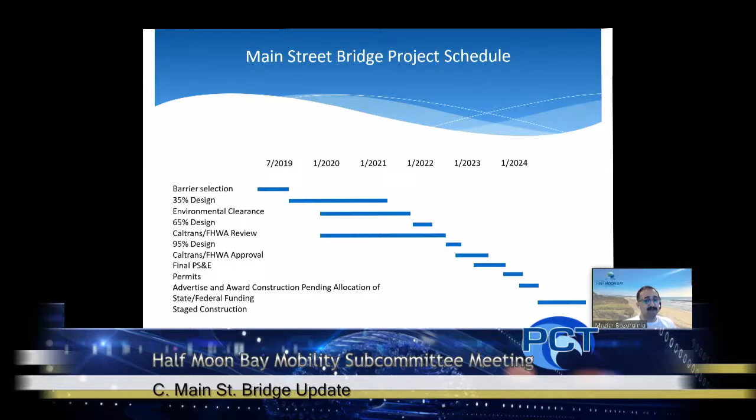Then we come to the costs we have so far to date. Our project for design and environmental clearance had a $1.2 million budget. Of that 1.2 million, over 88% was grant funding through the Highway Bridge Program. Overall, we're looking at 13.7 million.

That includes the design, and the beauty of that is we're looking at $12 million in overall grant funding for this project, which at the end of the day would be only approximately $1.5 million in local funds to supplement that federal and state grant.

Now, with the opportunities from the new infrastructure bill, there might be opportunities to actually supplement some of our local funds with additional grant funding. We'll continue to explore that as we go forward, and we have the time to do that with the final design, to see where else we can find funds to supplement the local proceeds.

I will say this: my understanding is that because we had to commit this money to move this forward, much if not all of this money has already been set aside budgetarily with this deal. So this is not new money we have to come up with over time - it's already in the bank, sitting in a special fund devoted to this. I think that's very good news and a financially prudent thing we've done.

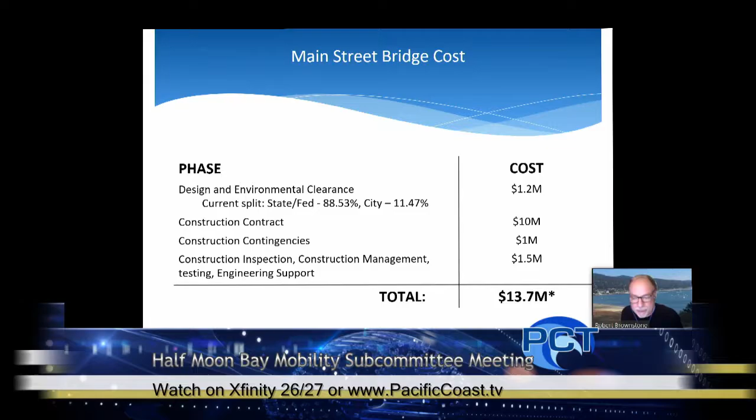Definitely put that on the next time you do this slide - that money already exists in an account somewhere. It can only be supplemented more should we get additional grants and need additional things, but it's always good to mention anytime you see a big number like that, people.

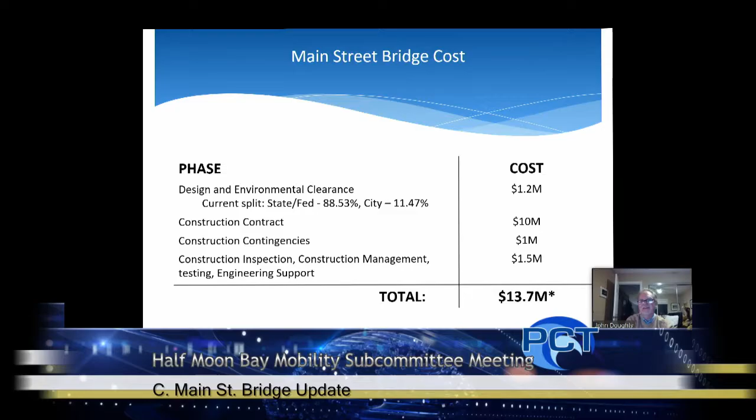I'll throw a little damp cloth on that, I guess. I like the optimism, but normally those other grant funds and grant dollars do not allow you to use them to match monies for a federal fund, and state funds can't be used either. So I just want to get real about it. Now they may change some of the rules as we move forward with Build Back Better, but I want to be realistic that it's maybe, but not likely, that we're going to find more money. This is the best mix and split of a grant to local funds that you're ever going to find, and I don't think we'll ever see these again, frankly.

Great. That was it for the presentation. Okay, again, we're happy to answer any questions you may have.

This time I have Mayor, can I just say — yeah, can I say a couple things to close before you go into questions?

Staff is — I mean, I was sort of being a little odd when I was saying a community member. I think everybody knows it's David Blovey, and there's no secret to that, and he wouldn't make a secret of it either. Let me just say, what I understand from speaking to him and meeting with him is what his request is — I think it's important to understand what's going on. His request, in essence, is to say he thinks we should bid out the Atkinson Noland repairs.

And we should make a decision on whether it makes sense for us financially to continue basically matching the monies for this federal project, or to go ahead with the Atkinson Noland project. Moz can certainly add a lot to this, but the bottom line for me is that the Atkinson Noland numbers came up 7 years ago, and they were basically spaghetti on the wall, frankly, with that deal.